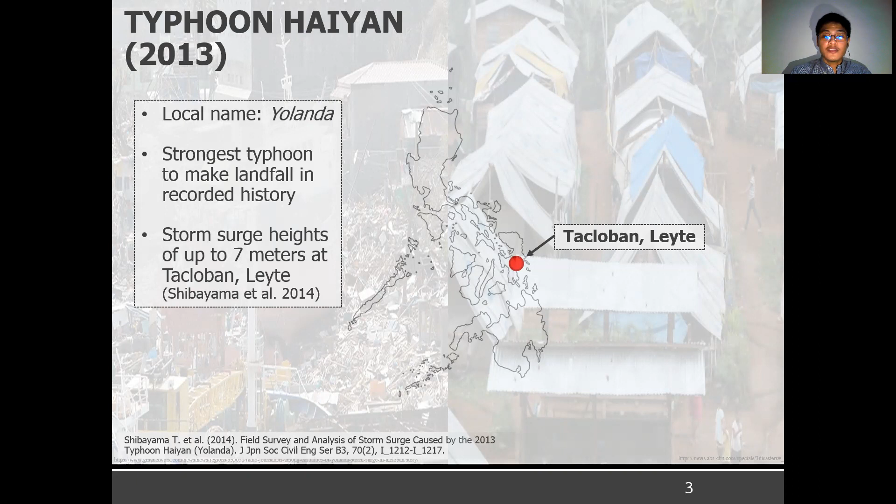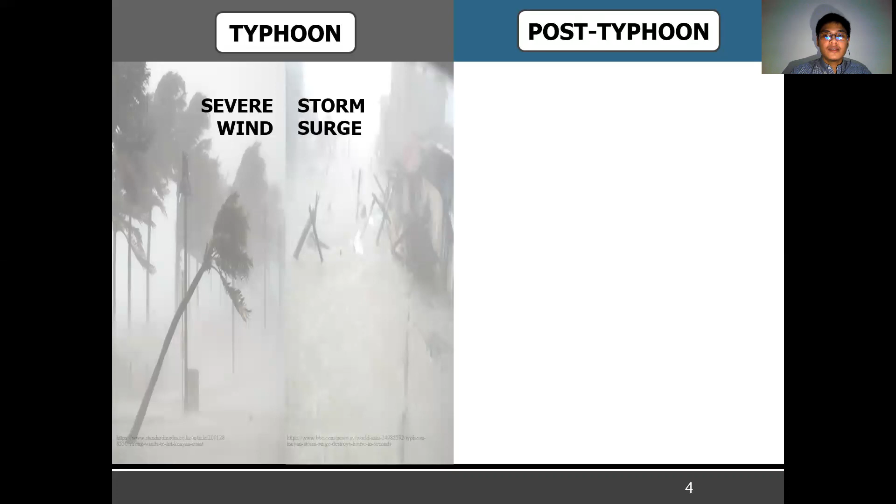Typhoon events usually cause massive damage to structures. Typhoons bring strong winds and rainfall. If certain conditions are met, storm surges could happen at the coastal area. After a typhoon event, damages to structures should be investigated for rebuilding and to prepare for future events.

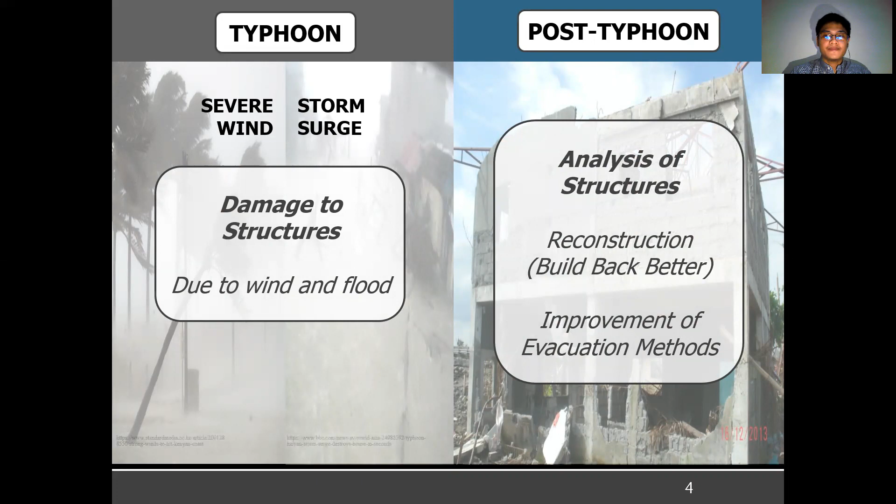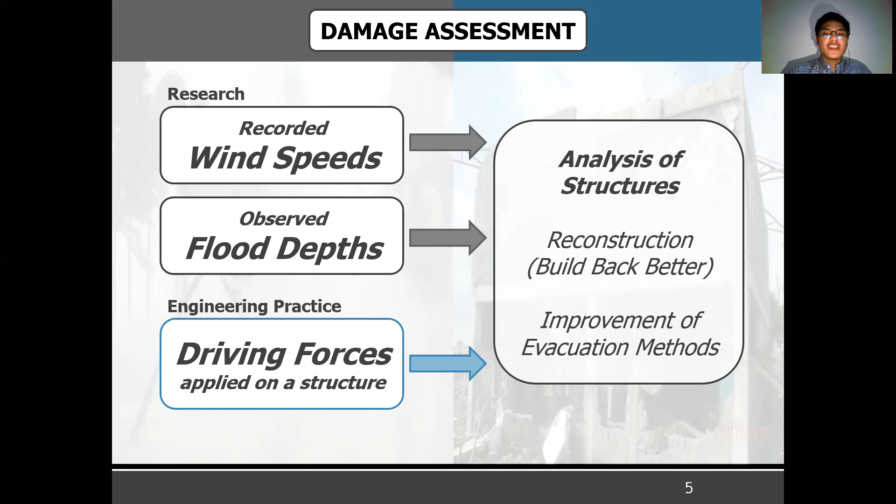In the view of research, the focus of damage assessment is typically on the hazards like wind speeds and flood depths. However, for engineering practice, it is important to consider the forces that the structure may experience due to a typhoon event. Combining these two views, research and engineering practice may significantly improve assessment of damage to structures.

In the Philippines, public school buildings are usually used as evacuation centers during a disaster. 2 years after Haiyan, the National Structural Code of the Philippines was updated. This code was used to design new public school buildings. Since many public school buildings were destroyed by Typhoon Haiyan, there is a need to check if the new design can survive another similar storm surge event.

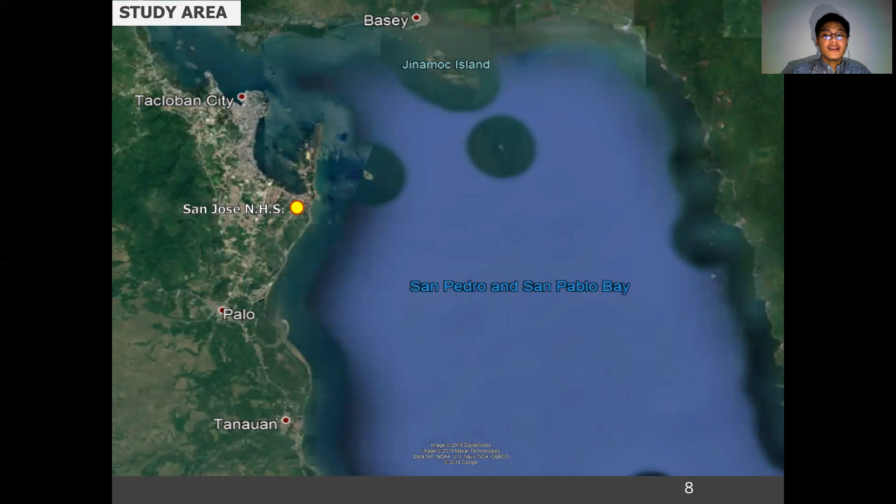Thus, the objectives of this study are to accurately simulate the 2013 Typhoon Haiyan and storm surge at San Pedro Bay using numerical models, and to investigate the strength of the beams and columns of a standard two-story public school building at Tacloban, subjected to the wind and flood forces from the simulations. The location of San Jose National High School in Tacloban was selected for this study.

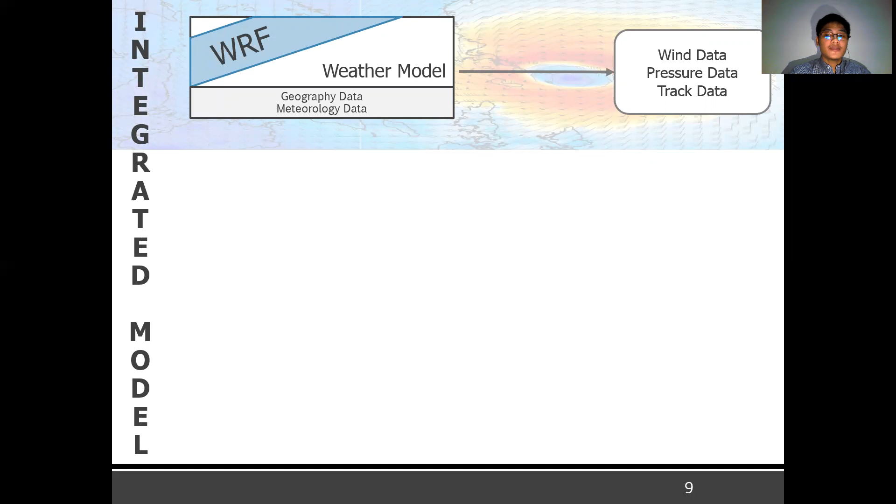The integrated numerical model used has three components: weather, surge, and structure. The WRF was used to simulate typhoons. Then, FVCOM was used to generate storm surges and inundation. Finally, STAAD.Pro was used for structural analysis.

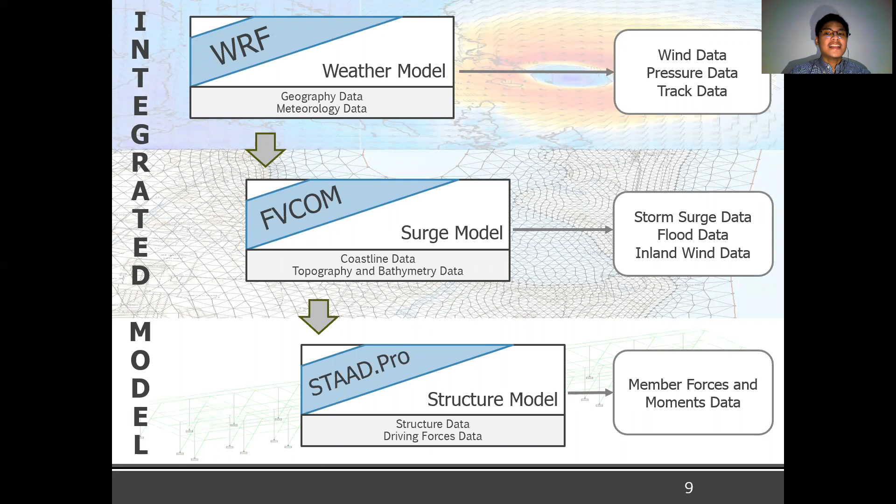The Weather Research and Forecasting Model, or WRF, is a numerical weather prediction model. Input geographical and atmospheric data are first prepared using a series of programs. There's an option to improve the initial boundary conditions using tropical cyclone bogusing, or TC bogusing, a data assimilation procedure wherein the existing tropical cyclone data are replaced with a bogus tropical cyclone using a Rankine vortex-based wind profile centered at the desired location. Then the typhoon is simulated using different weather equations and physics options. The typhoon track, wind data, and pressure data can then be extracted from the simulation.

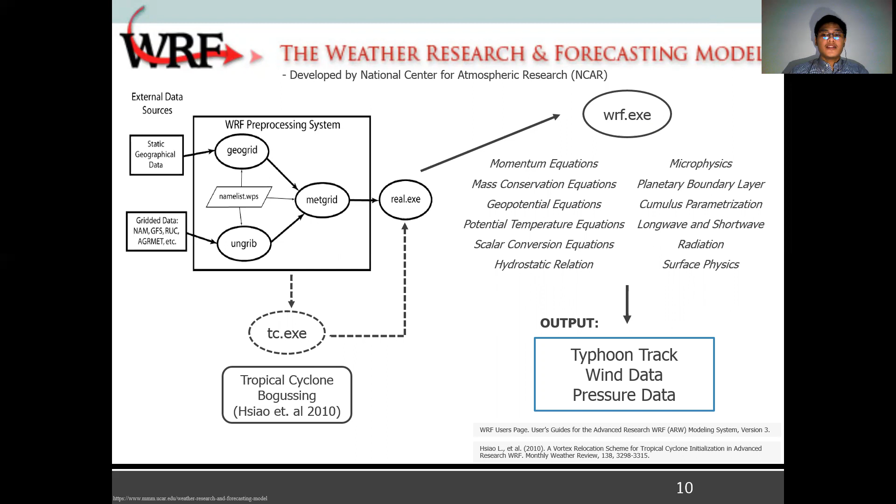The Finite Volume Community Ocean Model, or FVCOM, is a storm surge numerical model that utilizes the flexibility of the finite element method and computational efficiency of the finite difference method. Using the wind and pressure data as input, the change in water level over a mesh system is calculated using different flow equations. The outputs are time series storm surge data, inundation data, and inland wind data.

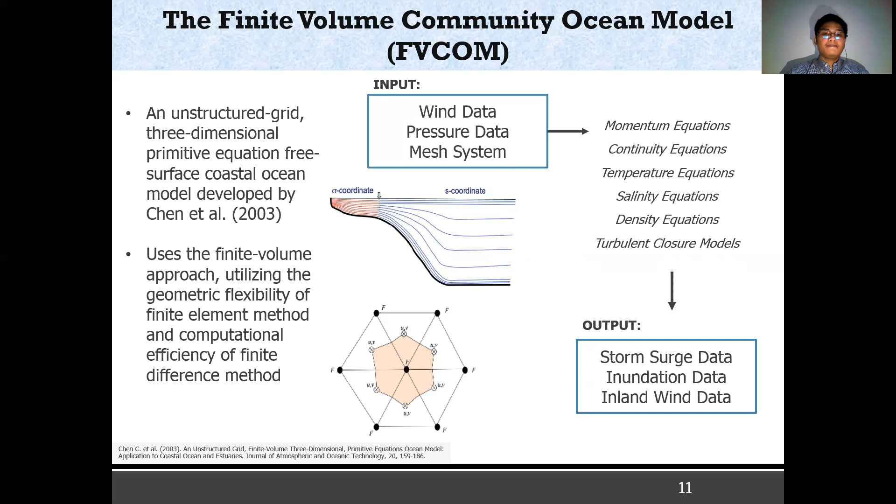Finally, STAAD.Pro is a three-dimensional structural engineering software that is capable of performing static and dynamic analysis. The structure can be easily modeled in STAAD.Pro and analyzed under the computed driving forces from FVCOM. The resulting beam and column forces can be obtained using static linear analysis and compared to the design strength of the structure.

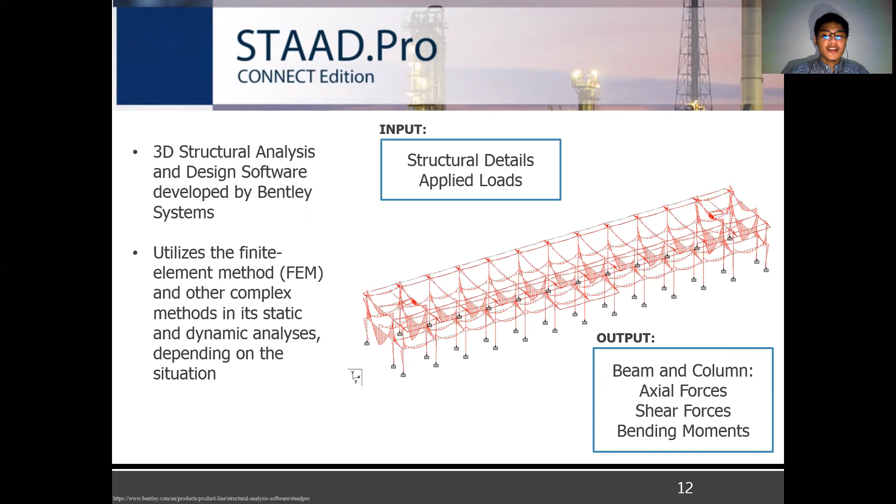For the WRF simulation, a parent and nest domain setup covering the track of Typhoon Haiyan from its early formation in the Pacific Ocean until its departure from the Philippines was used. The atmospheric files used for this study are the 6-hourly Global Forecast System 0.5 degree by 0.5 degree resolution data. Since it is difficult to simulate strong typhoons such as Haiyan, the TC bogus scheme was utilized.

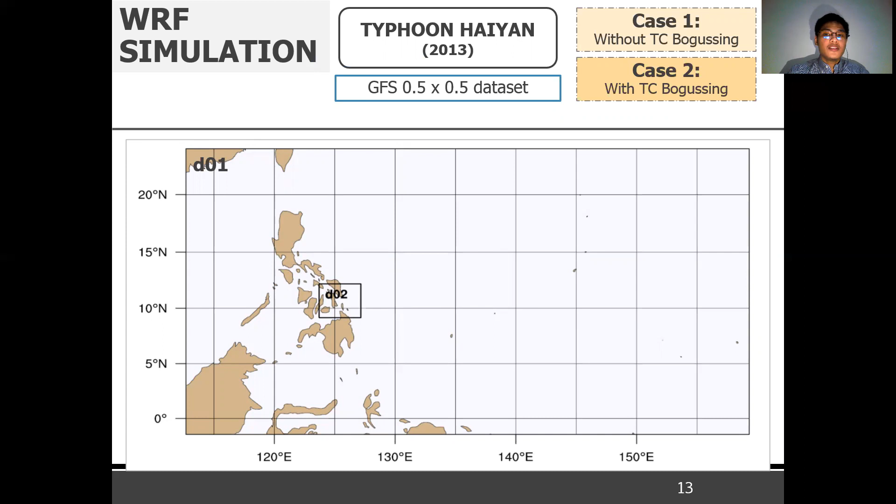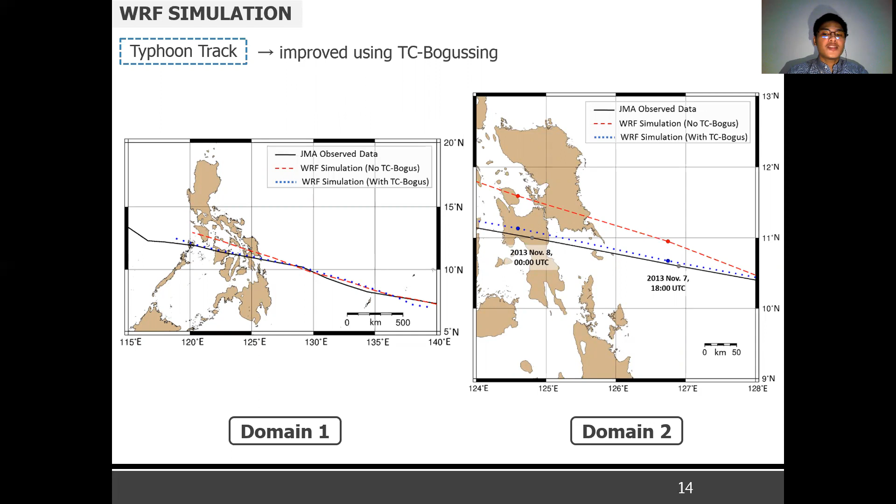For the WRF results, the comparison of the simulated typhoon tracks with the observation data over domains 1 and 2 are presented here. It can be seen that the TC bogus scheme was able to significantly improve the typhoon track, which is very important for storm surge simulation. The simulated minimum sea level pressure and maximum wind speed of the typhoon also significantly improved when the TC bogus scheme was used. Thus, the Typhoon Haiyan simulation was successful in the WRF model.

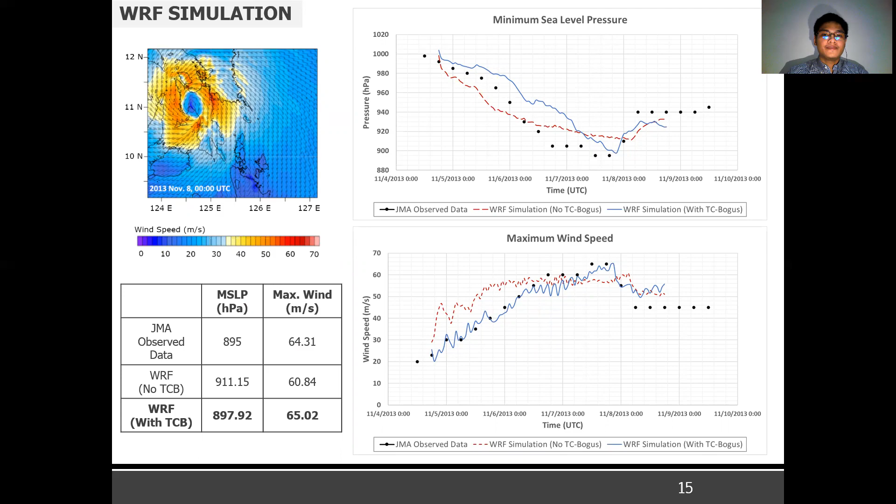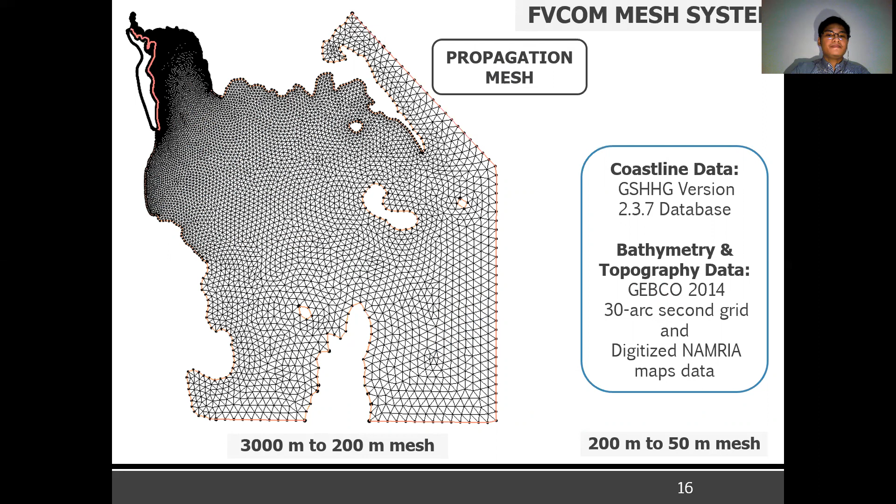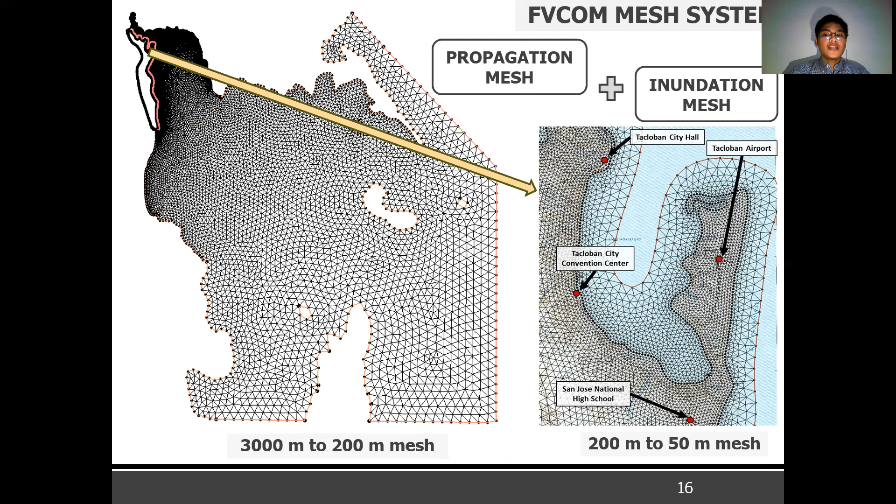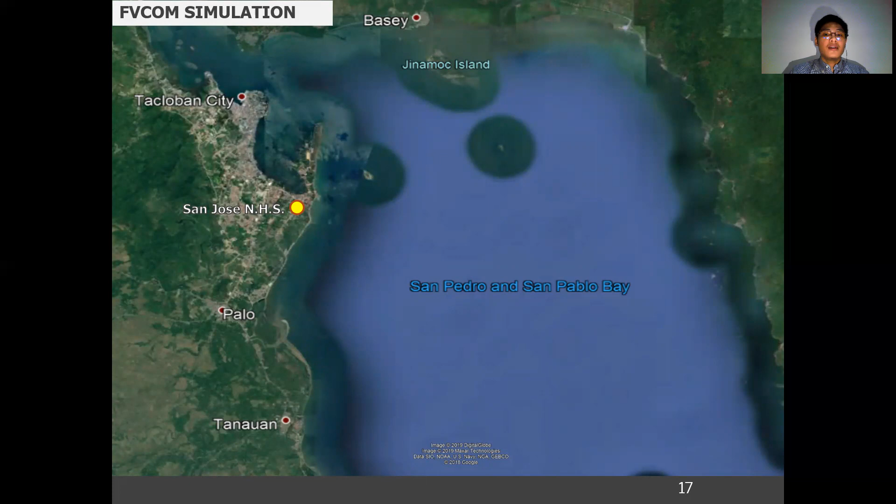For the FVCOM simulation, a propagation mesh was used to generate the storm surge at San Pedro Bay. Then, a nested inundation mesh at Leyte was used to generate the flooding in the area. The simulated change in water level during the passage of Haiyan at San Pedro Bay is shown here. The water surface in the bay first decreased before increasing up to 7 meters as Haiyan made landfall at Leyte.

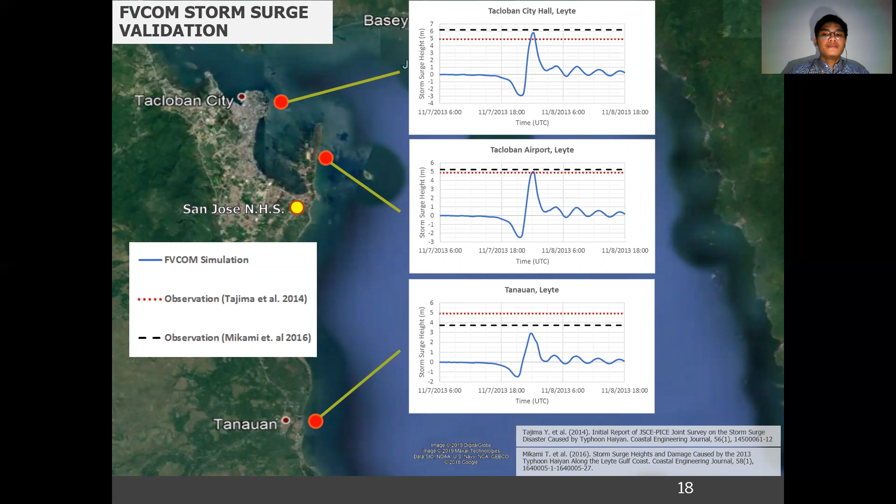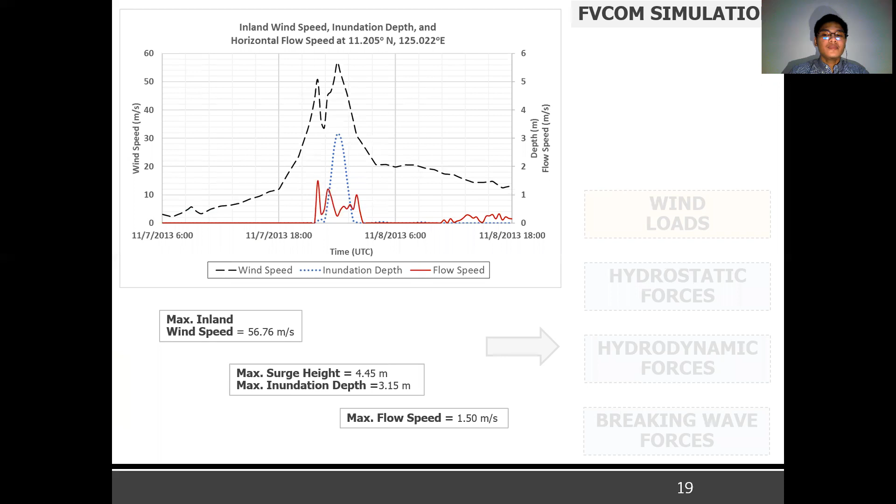The FVCOM results were validated using field survey data from these two research groups. The storm surge simulation results at the Tacloban area agreed well with the field measurements. The following are the time series inland wind and flood data at the location of San Jose National High School in the inundation mesh. In this scenario, the peak inundation depth of 3.15 meters almost reached the second floor of the building, which has an elevation of 3.45 meters. These results were used to compute the wind and flood forces to be applied on the public school building.

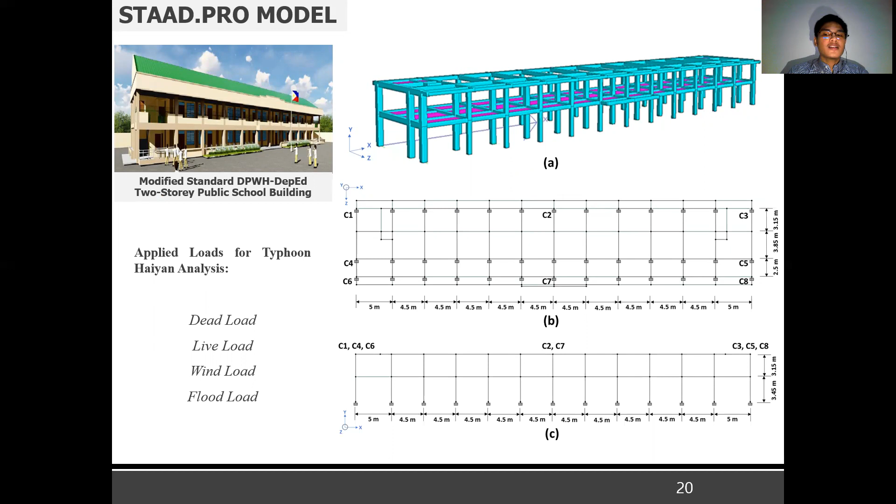4 general loading types were applied in the model structure in STAAD.Pro during the simulated storm surge event: the dead load, the live load, the wind load, and the flood load. The flood loads were composed of the hydrostatic, hydrodynamic, and breaking wave loads. For simplification, the load combinations were applied to both the global positive x and positive z axis to indicate the direction of wind and surge forcing. The wind loads were applied to the exposed members of windward, leeward, and sidewall sectors of the structure, while the flood loads were applied on the vertical members based on the calculated inundation depth and flow speed from FVCOM.

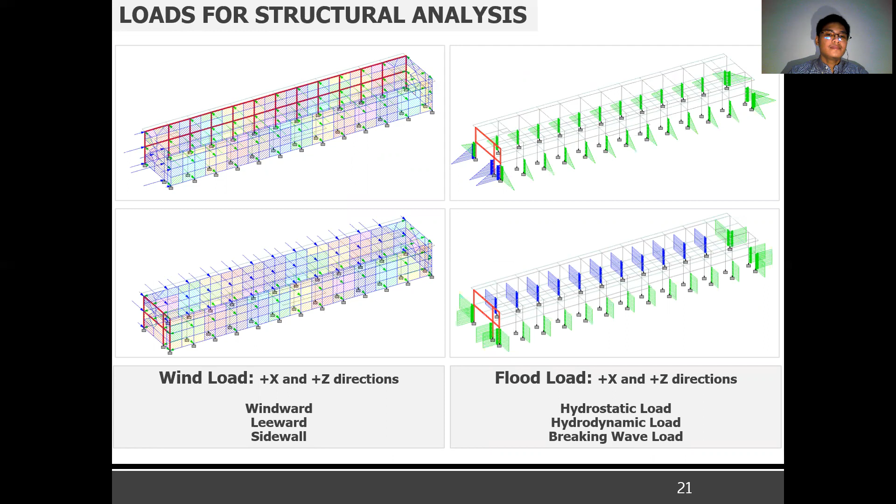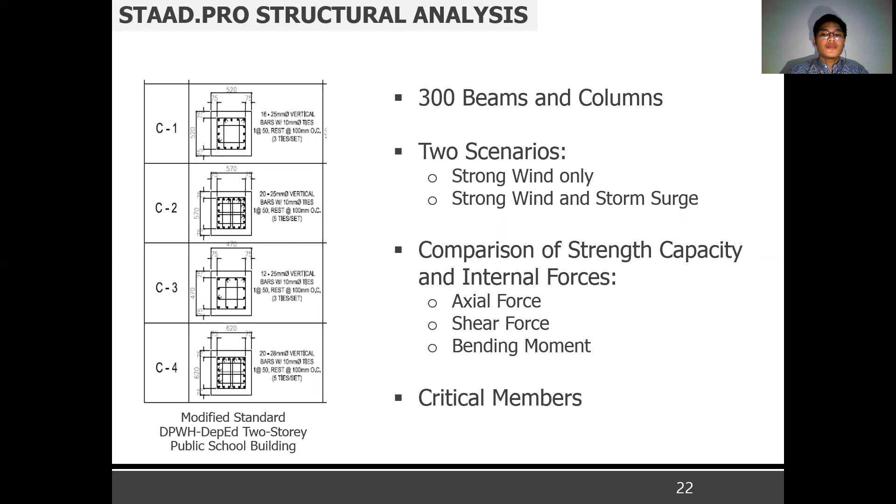A total of 300 beams and columns were analyzed. The capacity of each member was compared to the internal forces under two scenarios: strong wind only and strong wind with storm surge. Critical members were then determined. Here is a portion of the structural analysis results, showing the maximum axial forces experienced by the corner columns. No significant change between the two scenarios was observed since typhoon forces acted laterally to the structure.

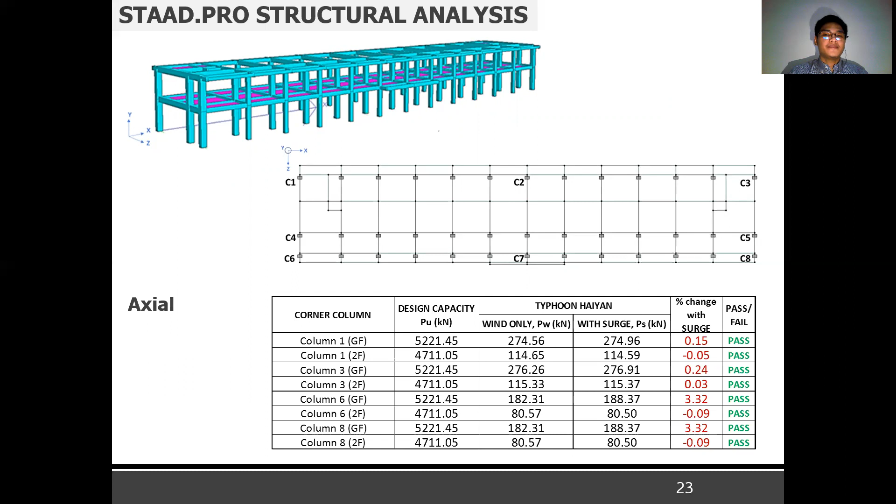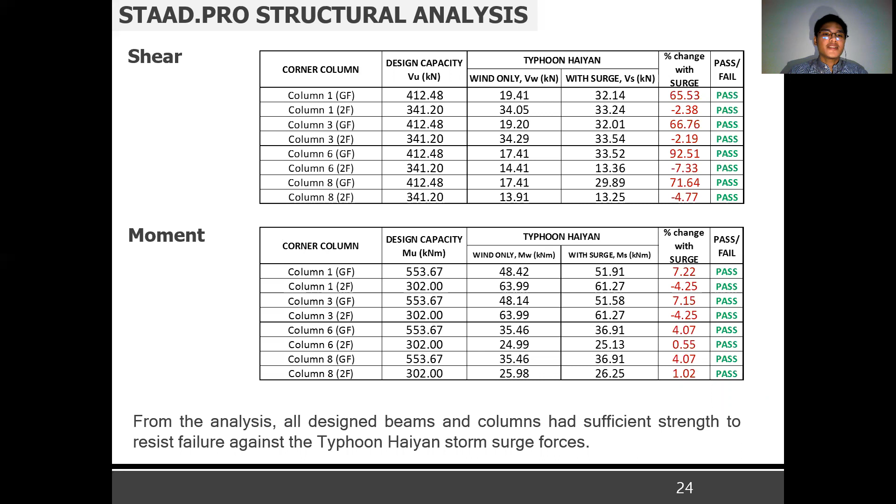For the maximum shear forces and bending moments, there were significant increases observed at the ground floor columns when surge was considered, since the flood loads acted on these members. For the whole analysis, all designed beams and columns had sufficient strength to resist failure against the Typhoon Haiyan storm surge forces. Based on the results, the driving forces due to the storm surge increased the shear and bending moments at the ground floor columns. Again, this was expected since the flood loads acted on the vertical members.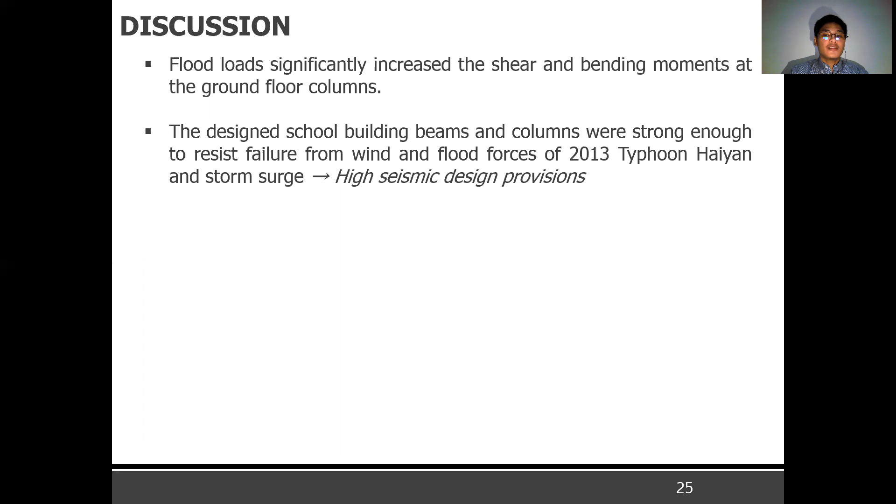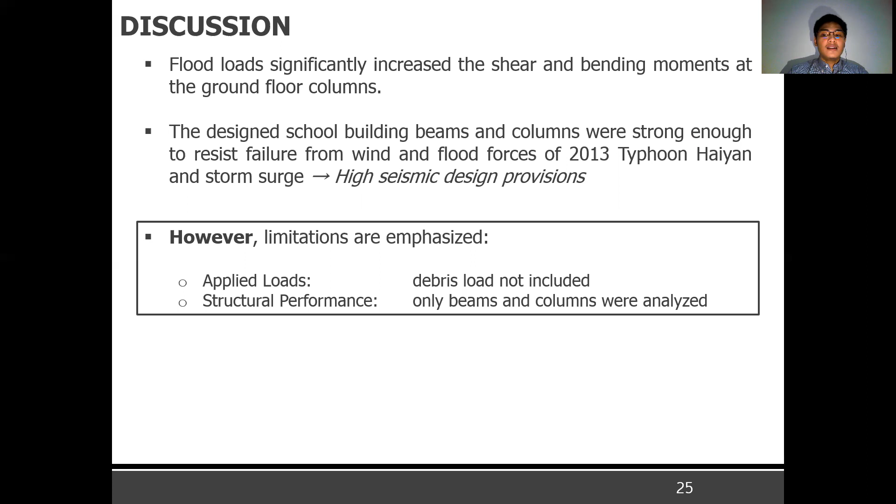But overall, the beams and columns of the public school building were strong enough to resist the driving forces of Typhoon Haiyan, probably due to the high seismic design provisions of the structural code. However, caution in interpreting these results is emphasized, since the debris load was not included and only the beams and columns of the structure were analyzed. The overall performance of the structure may vary when other parts such as the behavior of the foundation and roof truss are considered. But in a simplified view, the beams and columns can give a general idea of its strength since they form the structural frame of the building.

Therefore, the results should not be interpreted as a guarantee of survivability of the designed school building against another Typhoon Haiyan storm surge event. The highlight is the methodology to analyze any structure at any location against a storm surge event, given the versatility of the numerical models.

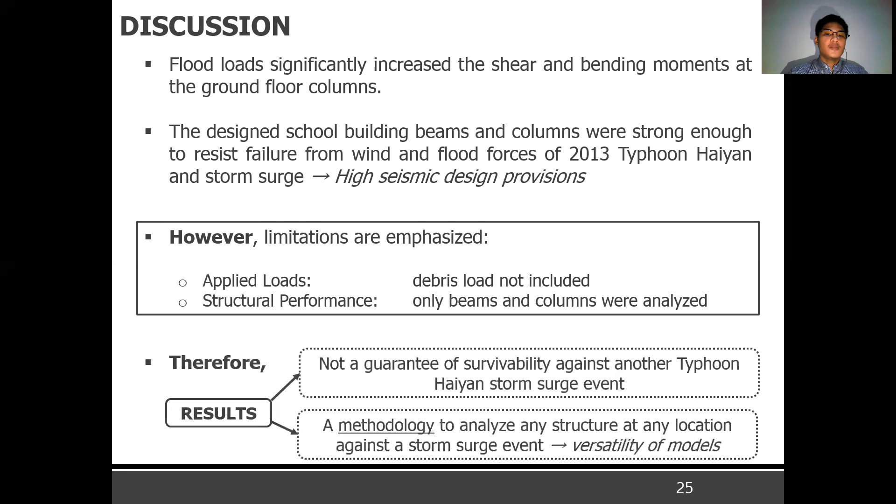In conclusion, the WRF-FVCOM-STAAD.Pro integrated model was able to accurately simulate the Typhoon Haiyan storm surge event at San Pedro Bay and Tacloban, and determine the driving forces needed to investigate the strength of the beams and columns. It was observed that the ground floor columns were critical members in the case study. Although all members had higher strength capacities than the applied wind and flood loads, there is still a need to check other loads and the response of other structural members.